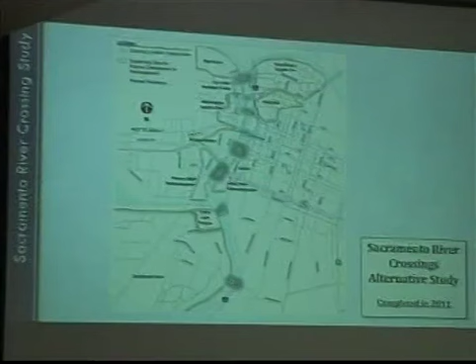So just a little brief bit of background here. The Sacramento River Crossings Alternative Study that was concluded in 2011 looked at several river crossings between Sacramento and West Sacramento across the Sacramento River. Those were identified here in numbers between 1 and 8. Crossings such as the Sutterville crossing and a crossing in location number 1 were eliminated early on in the process.

There are a couple other areas which include item number 7 here between Stone Lock and the City of Sacramento. That's actually moving forward for consideration in the West Broadway specific plan by the City of Sacramento. That location is identified as a bicycle pedestrian bridge crossing. In addition, could be a transit crossing in the future. But you can see those concepts moving forward in the City of Sacramento-led project there.

For item number 5, that's also a City of Sacramento-led project, and that's the future pedestrian bridge between R Street in Sacramento and the barn area and our waterfront in West Sacramento. As of right now, that's just a concept plan. There isn't anything that's moved forward that I've seen, but again, that is a Sacramento-led project.

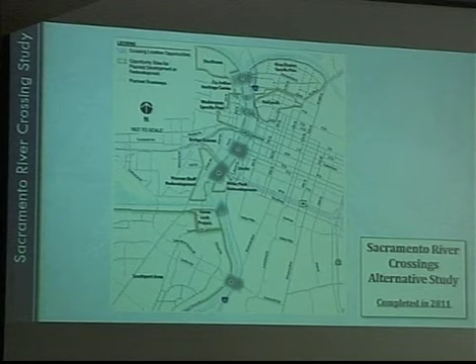For our purposes, there are 2 bridge projects that are currently in process in the planning approval and environmental document phase. That is the I Street Bridge Replacement Project, which is identified as number 2 on this plan, and also the Broadway Bridge Project, which is identified as number 6 on this plan. As I said, both of those are moving forward. The I Street Bridge Replacement Project is a City of Sacramento-led project, whereas Broadway Bridge is a West Sacramento project.

So here I've highlighted those areas. The North Market area is the I Street Bridge Replacement Project, and South Market is Broadway Bridge. The goals of these projects are shown here. Increasing economic development is a primary consideration. Improving the potential for planned urban development to make walking and biking easier across the river, facilitate connectivity, reduce vehicle delays, increase the riverfront access, and improve safety and emergency access.

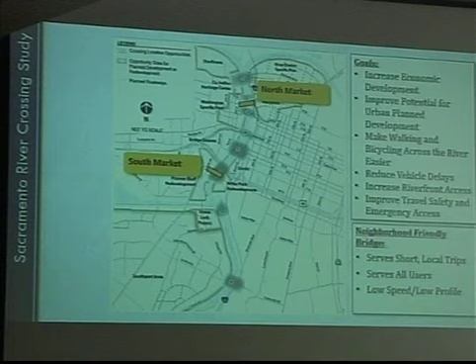This bridge follows the neighborhood-friendly bridge policy developed by the City of Sacramento. Among other things, it looks to serve short local trips, and it's going to serve all users—bicycles, pedestrians, vehicles, transit. It's also intended to be a lower speed, low profile bridge, with other concerns including making sure it does not go directly into a residential neighborhood, and that it be architecturally pleasing.

If you look at the City of Sacramento's neighborhood-friendly bridge policy, which I believe I presented to this commission about a year or a year and a half ago, it has a variety of things that we were intending to follow with all of our bridges that cross the river.

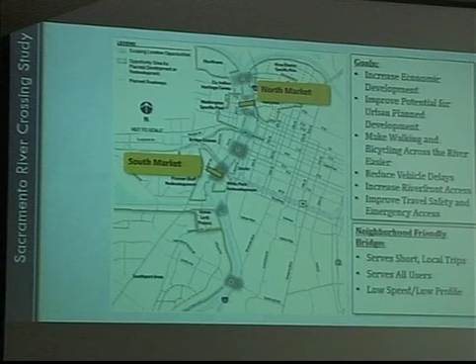Here is a plan of the I Street Bridge Replacement Project. It also includes a map that shows the existing historic I Street Bridge. The areas identified in red on the map are the bridge approaches that are intended to come down with the I Street Bridge Replacement Project.

The I Street Bridge received Highway Bridge Program funding, a federal program that provides 80% of the cost of the bridge. In exchange for eliminating these additional approach bridges, we received funding, which is a good swap for Caltrans because it's fewer bridge structures to maintain, reducing their cost. As a result, we get to have a new bridge that serves all users.

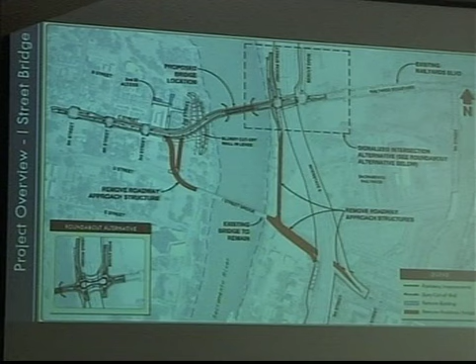So as I mentioned, we've had a couple of milestones. One is that the environmental impact report was completed. Just a little information on an EIR: through the Environmental Quality Act, it provides the ability for the public to review any potential impacts associated with a project and provide comments on that.

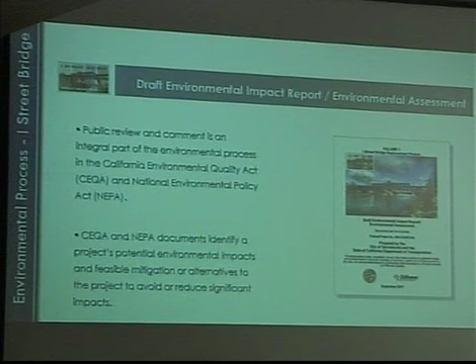Since this is a federally funded project, it also has to follow the National Environmental Policy Act, or NEPA. This document was prepared and identified a variety of environmental impacts, presented different alternatives, and also provided the means to reduce or avoid significant impacts.

That draft EIR was circulated for public review and comment for 45 days, from September 28th, 2017 through November 12th, 2017. This commission was notified when that process was occurring. After the close of the environmental document, the comments were collected and responses were generated.

Those responses were then published in a final EIR. That final EIR, as of the 25th of June, was approved and certified by the Sacramento City Council at their latest meeting. At that meeting, they also approved the preliminary plans—the same plans that are before you now—with no comments, and the same with the EIR, no additional comments.

They're going to be filing a notice of determination this month. As I said, it will be going to the West Sacramento City Council for consideration on August 7th. There is a change from the staff report I prepared, which looked at October for NEPA approval. We've been working with Caltrans, and to my delight, I found out today, as did the City of Sacramento, that they adopted the NEPA document and certified the NEPA process at the same time Sacramento approved the EIR. So we have now received federal and state environmental approval for the project.

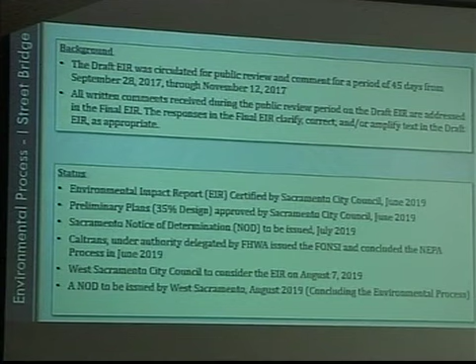As far as the bridge design goes, you did receive the 35% design in your packet. What I'm showing here are the cross sections of the existing historic bridge—the double-decker bridge with the railroad on the bottom—versus the proposed new bridge cross section.

The physical parameters of the bridge itself were set by the U.S. Coast Guard. They require a navigational channel of 278 feet clear, to allow larger barges and larger vessels to navigate underneath the bridge between the abutments. There is also a 56-foot opening height above the 200-year water surface elevation, which would require a movable bridge. All bridges crossing the Sacramento River, since it is navigable waters identified by the U.S. Coast Guard, have to allow for these larger vessels to go through.

So there are two options, either a fixed bridge, which was eliminated early in the process due to the impacts on the communities on both sides of the river, or a movable bridge as has been designed. This is going to be a vertical lift bridge, as I previously reported to the Commission, due to the large span required by U.S. Coast Guard.

The towers are approximately 120 feet high, but that is not a limit. They could be slightly larger or higher, or slightly lower. It just depends on the design, which is currently in process, and I'll show you that in the next few slides.

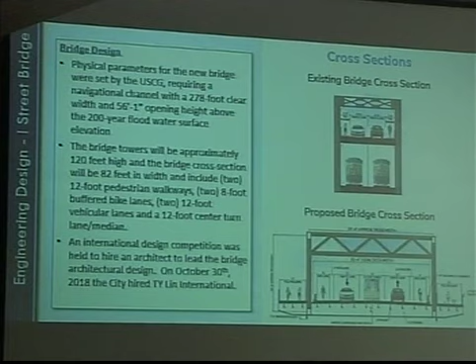However, there was some outcry by the public wanting to see a more international scale design competition. We went through that process with Congresswoman Matsui and council members on both sides of the river participating on a selection panel, and ultimately bridge architects T.Y. Lin were selected to prepare the design for the project.

Moving into the design, I'm sure a number of you participated in the Community Outreach Workshop #1 for the I Street Bridge architectural design. That was held in Old Sacramento and was very well attended, by almost 300 people. In addition, several hundred people online participated in a virtual community workshop for the project.

There were 9 different bridge options brought forward for consideration by the public, who were asked to review the different concepts and provide input. Moving forward, there's another public workshop, this time in West Sacramento over by the Ziggurat building on the waterfront. It's going to be an outdoor meeting.

These concepts, which I'm about to run through with you quickly, were refined based on comments received from the public in both the in-house and online workshops, and reduced to 4 alternatives. But for right now, I wanted to show you the original concepts that were brought forward.

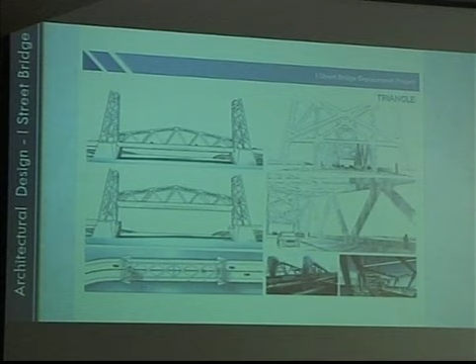These include the triangle, which is more of the basic bridge type, and the through, also a basic bridge type, but with some significant features that the public found interesting. In your packet, I included the outreach results so you could compare what the public said in the online virtual workshop versus the in-house workshop.

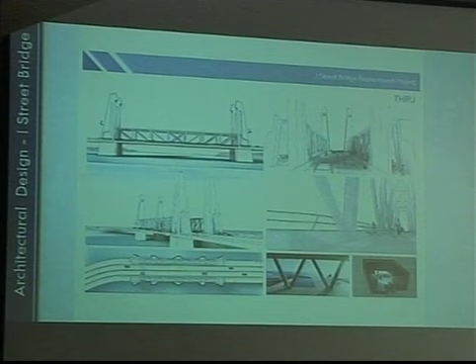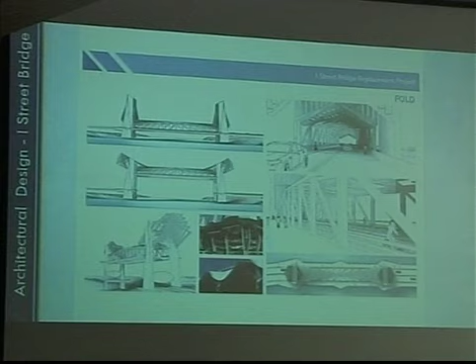The fold represented the last of the Tier 1 options, which were the lower-priced bridge options, ranging anywhere from $100 million up to around $300 million. Those costs continue to be refined, and as we move forward and narrow these concepts down to hopefully just one, we will continue to seek efficiencies in materials and reduce costs where possible.

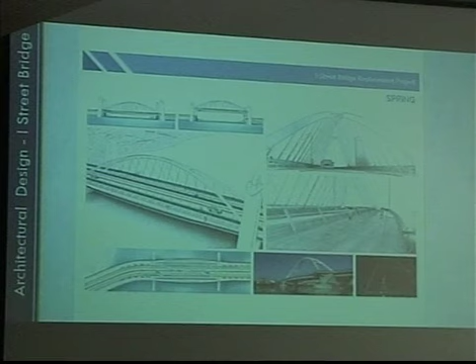The spring concept was one of the middle-of-the-road options and was introduced following a lot of discussion with our design ad hoc committee and selection panel. There was also the flutter concept, and the garden concept, which, as you'll note in the packet, was one of the most well-received. This introduces actual garden or landscaping features on the bridge itself.

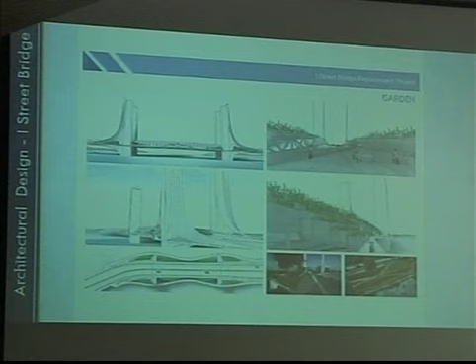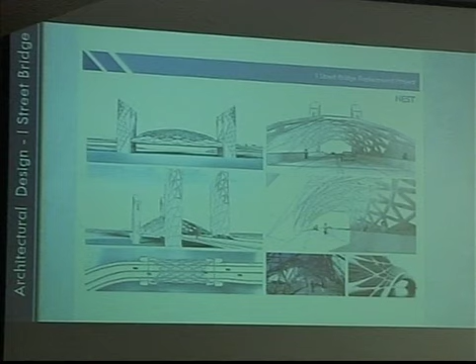The nest, which represented a more futuristic aspect of the project. The flight. And finally, the solar arch. All of these concepts that I've shown you have been further refined and will be reintroduced at the workshop coming up on July 10th.

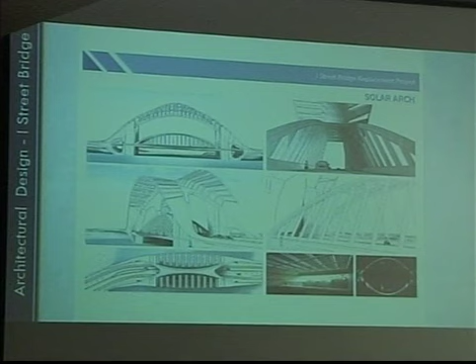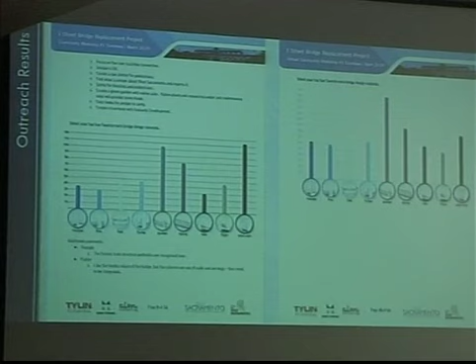This shows the different ratings that were received by members of the public. Some of the top ones included the garden concept, the spring, and the solar arch. That seems to have resonated with the public online as well as those attending the workshop.

Community workshop number 2 is going to be occurring in West Sacramento. Here's the address: River Walk Park, 651 2nd Street. Participants will have an opportunity to review the results of the first workshop. However, those results are also available online now, as well as on the city website.

Four refined concepts will be presented from the initial nine bridge concepts that were introduced. There will be representatives from both cities, as well as the project design team, available to answer any questions and take public comment on the designs shown.

Specifically, what was asked at the first workshop was to identify those concepts in these different bridges that you really like, and also to vote on those bridges that you feel should move forward into the next phase. So now what we're asking the public to do is look at these four concepts and specifically tell us what design elements you appreciate, what design elements you don't appreciate, and what's missing that you would really like to see.

What may move forward is either refined concepts once again, bringing forward maybe two different concepts, or there could be all new concepts based on the comments we receive. We are extremely open in this phase of the design in order to try to reflect public opinion to the greatest extent possible.

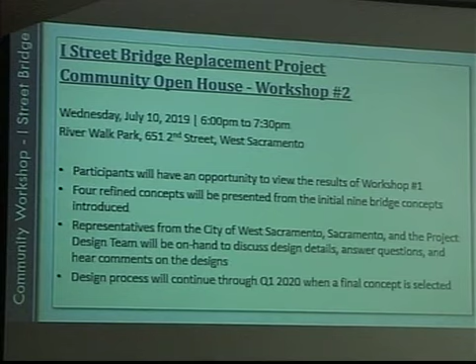The design process will conclude in the first quarter of 2020, and hopefully at that point we will have one concept that will be selected by the Bridge Design Selection Committee.

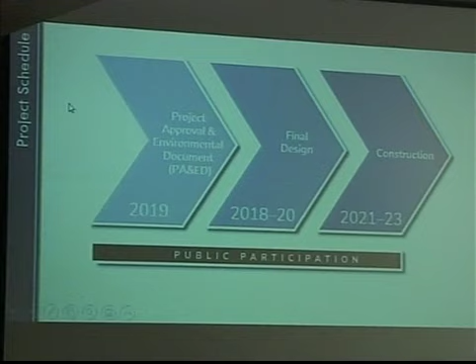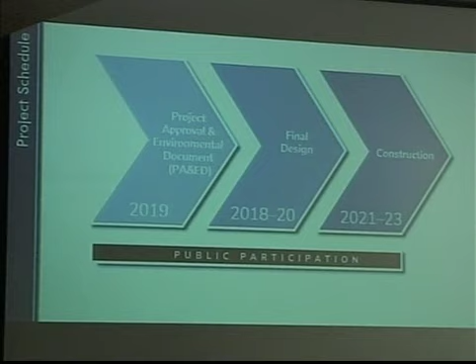This is the project schedule. Right now we are concluding the project approval and environmental document process. It will be closed out by the end of this year. We're looking at October to receive authorization from Caltrans to proceed with the right-of-way and final design phase of the project. Then we're going to be moving into construction.

One question that comes up often when talking about the new bridge is what's happening to the existing bridge. As I mentioned, we had an ongoing project, a feasibility study, to analyze the top deck of the bridge and the bridge itself to make sure it's structurally sound, and to recommend alternatives for constructing new bridge approaches to the top deck and look at different design concepts.

We had an outreach event called the Lantern Festival. Some of you may have attended. It was attended by over 3,000 folks, very well attended and appreciated. It gave everyone a new perspective on the bridge. A lot of people are scared to even go across that bridge, but when there's no vehicles on there, it allowed everybody to see Sacramento and West Sacramento through a different lens.

It will also be a great vantage point for seeing the new bridge that will be constructed by 2023.

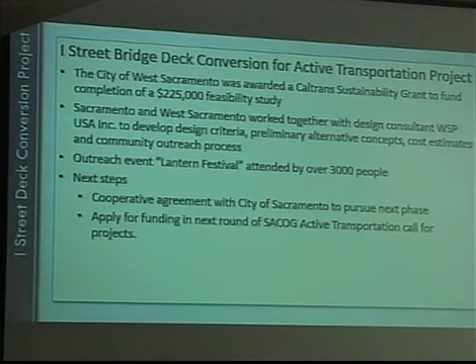One of the next steps we're looking at for this project is that the City of West Sacramento, on June 25th, adopted a resolution to move forward with continuing to work with the City of Sacramento on this project. So what we're looking for from the Commission is also a nod to continue working on this. And if we also get that from City Council, then we will work towards submitting an application in the next round of funding through SACOG's ATP program, the Active Transportation Program.

And that concludes the presentation. If you have any questions, I'm happy to answer them to the extent possible.

Thank you very much, Mr. McCoy. Commissioners, any questions? Commissioner Zimmer. I just have a question.

So I'm really excited about these projects, both of them. And I have a question about the existing bridge. I know you guys are going to be removing lots of the approachways onto the bridge. And I go across this bridge often, and I can't help but notice that it leads right into Sacramento Valley Station.

So I was wondering if there had been any consideration as to whether that bridge, the top deck, might someday be used for, say, a light rail extension, and if that would affect the planning on the approach decks.

Well, the top deck, the way the bridge was designed, was to have vehicles and, to a very small extent, pedestrians crossing. It was designed back in 1911 and finished construction in 1912, it was great for a Ford Model T to cross, just the right width for two of them. There wasn't that much consideration for pedestrians. However, it's not enough clearance for transit vehicles like a bus, or definitely not for any light rail or streetcar. That's part of the reason the rail is on the bottom and has a higher profile to allow those vehicles across.